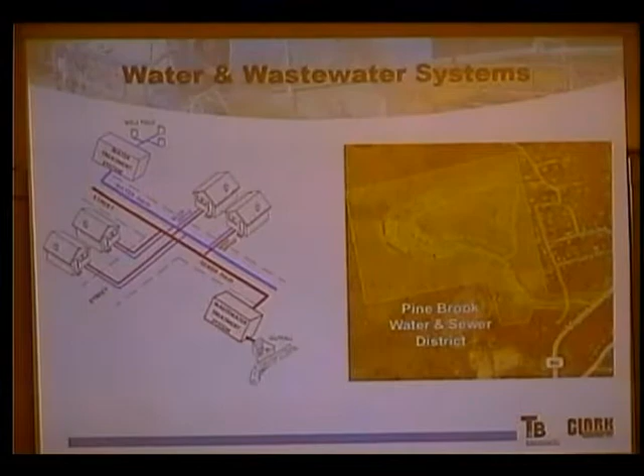So again, I'm Erin Moore, and I'm from Tighe & Bond Engineering, and I was one of the project leaders. Oh, how are we doing? Okay, good. For the Pinebrook water and wastewater system evaluations. And before I discuss the specific evaluation, I just want to provide you with a quick review of water and wastewater systems, just to make sure we're all on the same page.

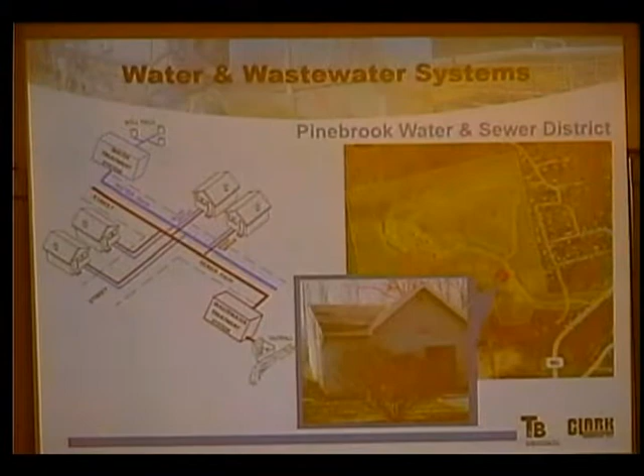So the water system for Pinebrook consists of source wells, there's 3, and a water treatment plant, and distribution piping, which carries water to your house that you use for drinking water. The wastewater system consists of collection piping, which takes sanitary sewage from your house, brings it to a treatment plant, it gets treated, and then discharged to a little stream. And actually, that's the water plant down there, red dot, and there's the wastewater plant there shown at the red dot. And I'm sure with the small community, you know where both of these locations are.

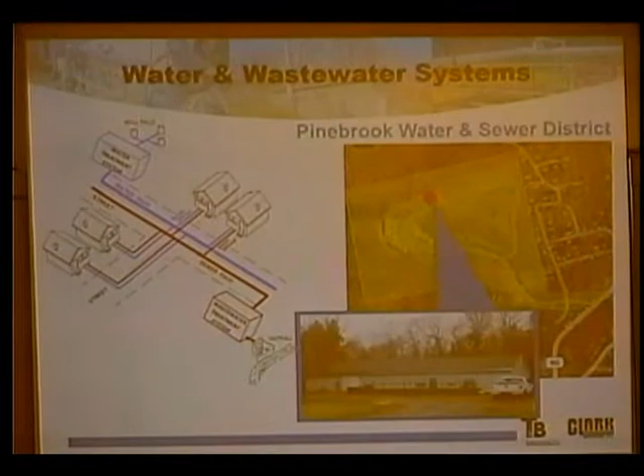So there were 4 main steps to the system evaluations. Understanding what's there, what's the existing system, and then understanding what improvements were needed, what could use some improvement, prioritizing these improvements, what was critical and what was less critical, and then estimating project costs.

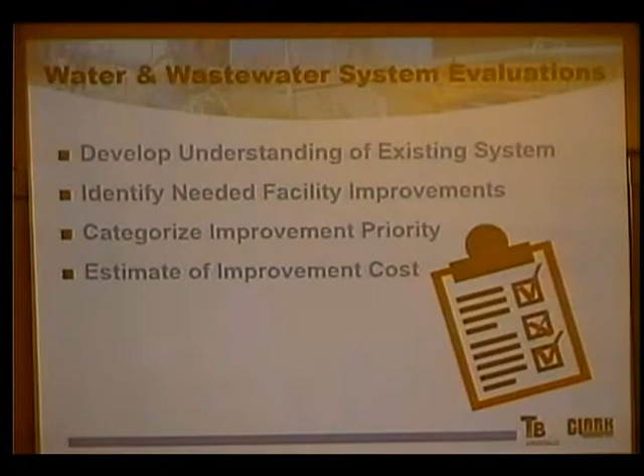The items that we reviewed for the water system improvements include system capacity, how much water do you have? Fire flows and the pressures in the line. Do you have sufficient, either of those? The water quality, drinking water quality. The physical conditions of the facilities, and if there was any potential for interconnections with another water system.

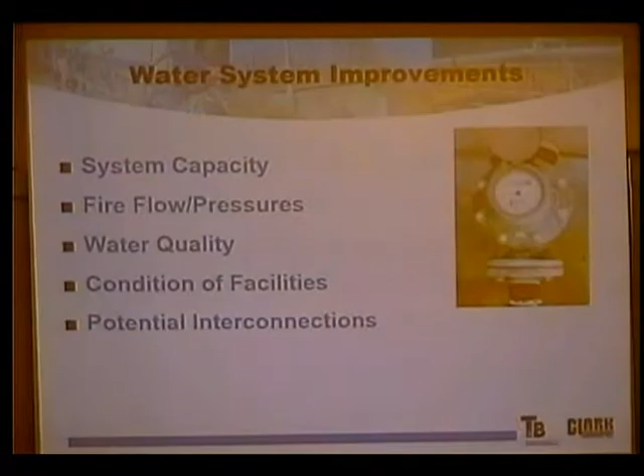For the wastewater system evaluations, we looked at the capacity of the plant versus how much wastewater is generated from the community. Inflow and infiltration. This means is stormwater getting into your sanitary sewer pipes, and is that a significant problem? The quality of the wastewater effluent, so how clean were we getting it, and then the physical condition of the facility.

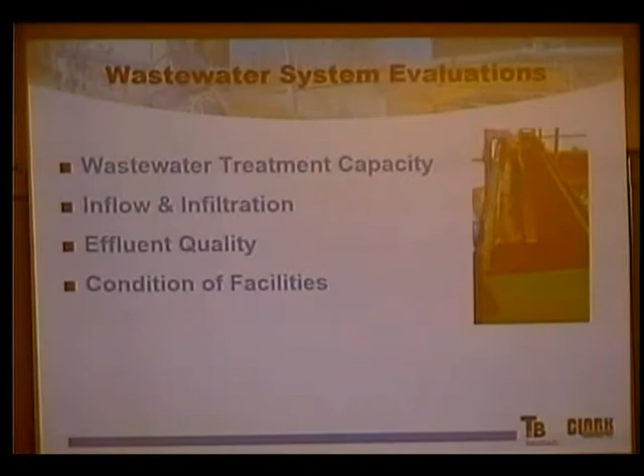So to evaluate the physical conditions of the facility, we completed a very, very full day on March 11th of site visits. We saw the water and wastewater facilities in the same day, and it was a lengthy adventure. We looked at the site, just what's there, the driveway, parking, fences, any physical site characteristics, safety components, the actual treatment equipment or mechanical equipment, the physical buildings themselves, the support systems, heating, ventilation, electrical, if there was any fire suppression, instrumentation and gauges, things along those lines. And then also for the wastewater systems, we inspected all the manholes in the system.

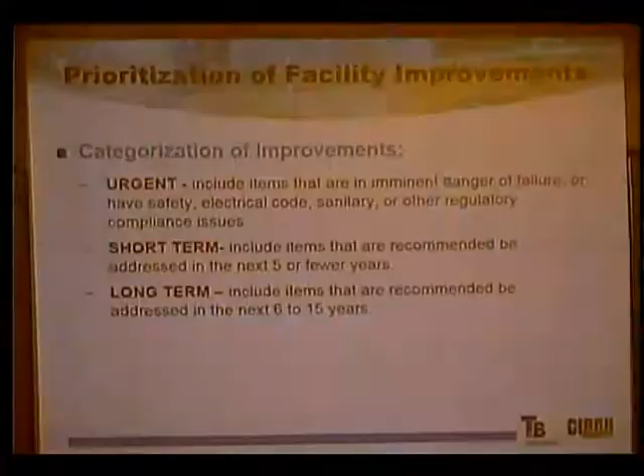And then once we identified the needs, we prioritized them. Urgent issues were mainly safety issues or equipment that we felt was about to fail. Short term were things that we thought should be replaced or dealt with within the next 5 years. And long term are things that needed to be dealt with in the next 15 years.

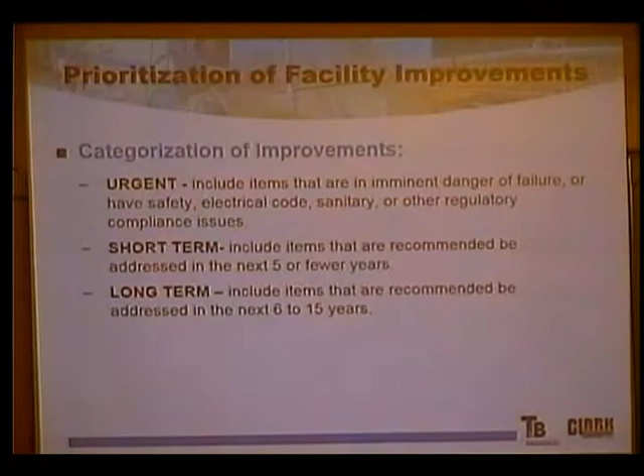And then we developed costs for those items. So system costs included sometimes getting equipment quotes, and then estimating how much it would cost to get existing equipment out of the building and then put the new equipment in. And then, if needed, providing temporary services in the interim when that work was going on. Then we applied standard markups to all the costs for contractor overhead, engineering design, costs that would impact the system owner, whoever that may be, and a percentage for project contingency, to account for unknown conditions.

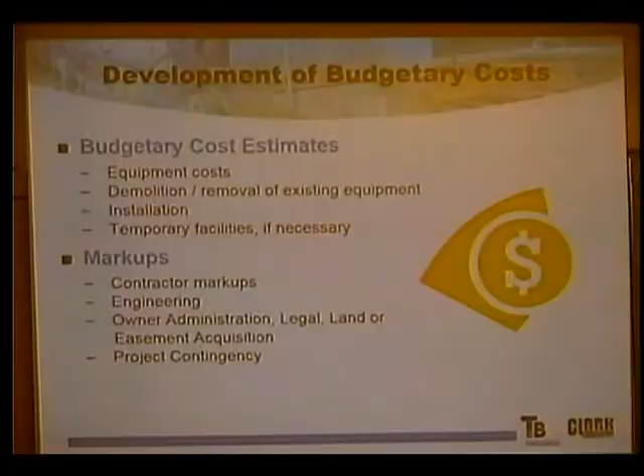These costs are intended to be very conservative, and we looked at the projects as if you did one single thing and you didn't group it together. Also, that you didn't use any in-house staff. You went out to bid and got a contractor for all of these activities. If work's done in-house or there's a group of work done at the same time, there's obviously savings with that. But for budgeting purposes, we need to be conservative because we don't know how these projects would be approached in the future. So that's just how we typically handle this, so you can look at one item and have a cost associated with one single item.

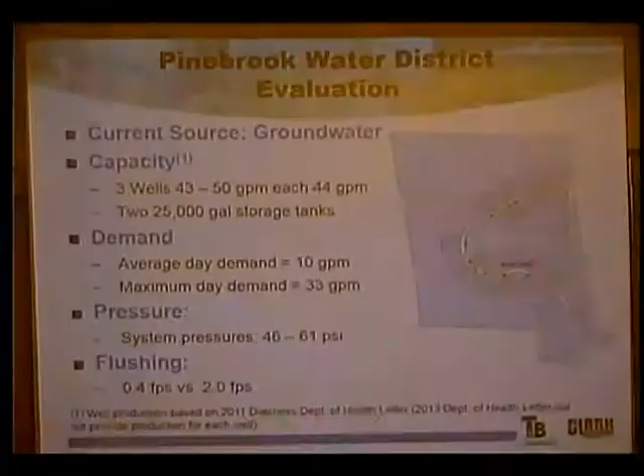So now I'm going to speak specifically about the water system evaluation. So there are 3 source wells. The wells produce between 43 and 50 gallons per minute, which is very sufficient for your residential water needs. But it is not sufficient for fire suppression. So there is not sufficient flow to provide fire suppression from your water mains.

The system pressure is acceptable, but there are hydrants that can be used to flush the system, but you don't get a sufficient velocity out of that. So in other words, we'd like to see water moving faster to really clear the lines out, and it's a little low for what we'd prefer to see.

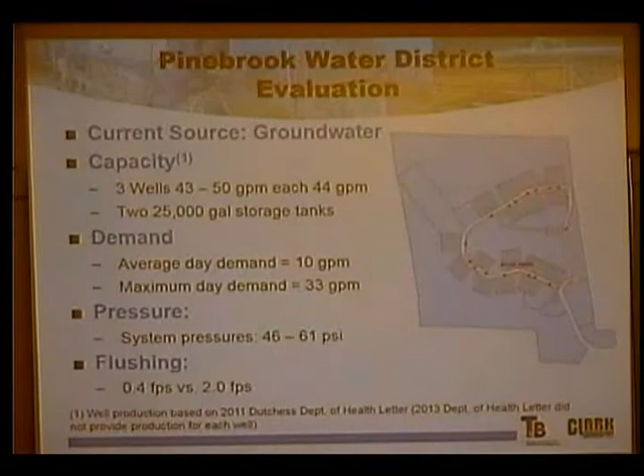The water quality at Pinebrook is generally good. There are a few issues that have popped up. There's high iron and manganese, which we tend to believe is from wells 2 and 3. There is high hardness across the board. Hardness is not a health concern, but you know it does things to your pipes and laundry and can make life in general hard, so to speak.

And then there also is high sodium, which is a concern for those with a very sodium-restricted diet. And so that's more of a public information importance, that if you have folks who are living in Pinebrook that have a sodium-restricted diet, they need to know that the drinking water is going to exacerbate that condition.

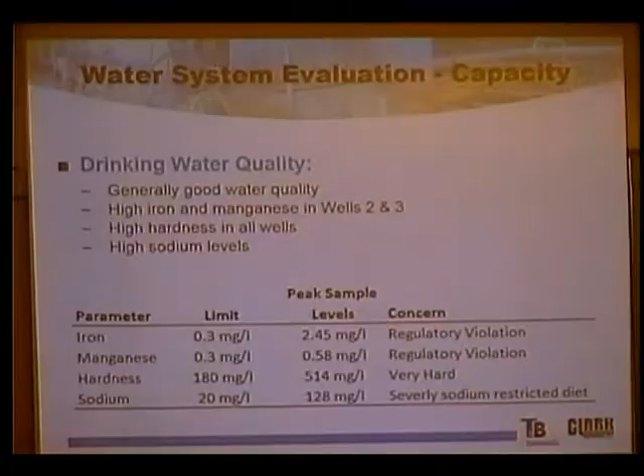So iron and manganese do have regulatory limits, and there have been violations for those limits. The other 2, hardness and sodium, are more guidelines that you'd like to be below, but they're not Department of Health violations by any stretch. If hard water was a regulatory limit, half of New York would be in violation, right?

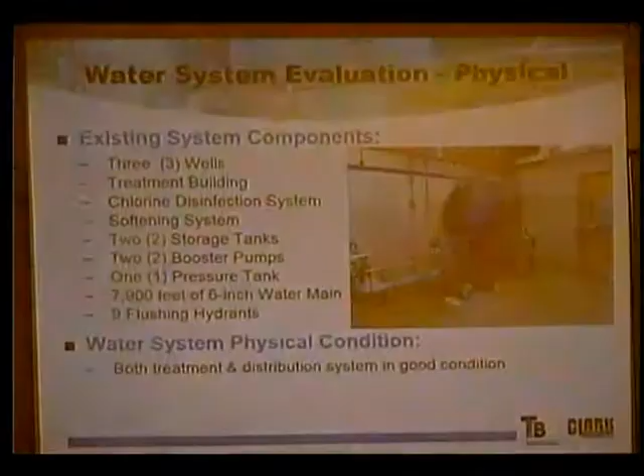So these are the existing system components. So again, we've got our 3 wells. We've got a treatment building, chlorine disinfection system, a softening system, 2 storage tanks, 2 booster pumps that are used to bring up the pressure, a pressure tank, just shy of 8,000 feet of 6-inch water main, and 9 flushing hydrants.

I just want to note the hydrants. While they're not, because of water capacity, suitable for fire flows, if a situation came where you had more water, they are the right type of hydrants to provide a fire connection. They do make little hydrants that are made just for flushing. These are real fire hydrants suitable for connections.

Go ahead. I have to look first. The fire hydrant. Yes. All right. Oh, sorry. I got in trouble. Used as the steamer connection. In other words, if the pumper has to pump into the hydrant. Can you just hold on for one? Oh, we've got a problem. Hold on. I'm sorry. There's a voice talking. You need to speak into, that's what's happening.

My question is, the hydrants on the property, if we need to use those hydrants in the case of a fire or a building going up, can the pumper, the fire truck, pump into the steamer connection of the hydrant and use the 2.5 outlets on that fire hydrant without backing up into the pump house?

While physically that could happen, your neighbors would not be a fan of that. In general, the fire department is very familiar with what you have there, and practices what you call rural firefighting techniques, which is tanker shuttles and bringing water there. Without that level of flow, when you open a hydrant to get a fire flow out of it, immediately everyone is going to have rusty, sediment-filled water in their houses, and again, would probably not be a fan.

So where were we? Okay. In general, both the treatment and distribution system is in good condition. Absolutely.

So based on the facility evaluation, we had several recommendations for improvement. First of all, as noted, there's typically only one well that's regularly in use, and the district was issued a violation from the health department because of this. However, it's believed that wells 2 and 3 are the ones that have the high iron and manganese, which has also caused, as we saw, Department of Health violations.

So what we recommend is to get all 3 wells flow tested. It doesn't look like that's been done any time in the near past, and really know what each of them are doing. The numbers we've presented were numbers that the Department of Health have on record, but we don't know where they stand. And then sample each well individually to figure out how much iron and manganese is coming from each well source. There are softeners on site which aid in helping with the iron and manganese problem. So get those running again, and then see where we stand, and be able to develop a course of action as far as that goes.

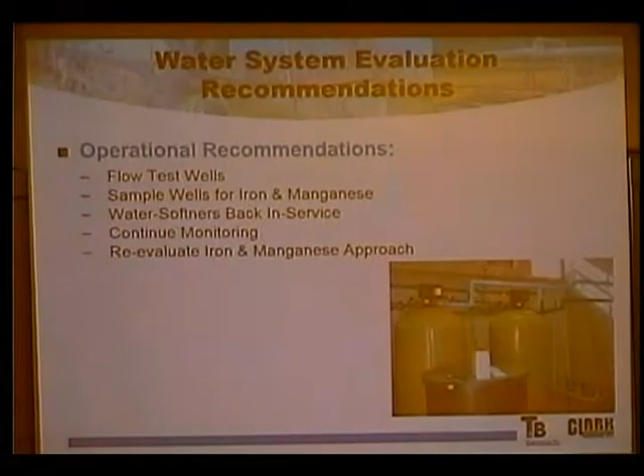Now, since we made these recommendations, the water softener has been brought back online, and the iron and manganese in the effluent seems to be good. However, the water softener is going through a lot of salt, which means money. Salt costs something. So still what we'd recommend is get them flow tested, sample each well, look at how much the softener's running, and figure out where to move from there.

But already taking this step and getting the softener running means you've got multiple wells running now, which is appeasing Department of Health. That's what they asked for, there to be multiple wells. So we're certainly on the right side of Department of Health when it comes to the things that we were cited for, and now proceeding forward. We just got to see how treatment is affected and how our salt usage continues.

So urgent improvements. There were several upgrades we recommended to the chemical feed system. The disinfection is bleach, it's a chemical. You'd like to see a few things for safety. Spill containment, that just means if the tank has a hole, it won't go all over the floor or into a drain. Labeling the tanks, so you know what's in there. An emergency eye wash and shower installation, and then also a ground fault receptacle for the chemical metering pumps are what we thought were urgent issues.

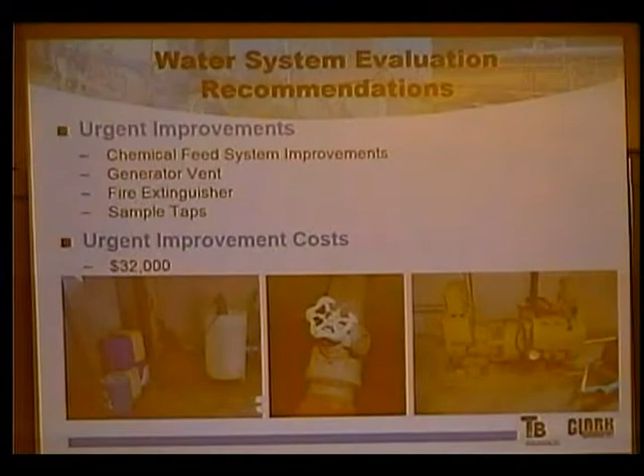Other urgent improvements include venting the generator outside, since the generator is vented in the building, providing a fire extinguisher, and replacing the sample taps. Let's see if I can get this to go on. That's the sample tap right here. So you can see that might not be the most sanitary sampling, and you could have perfectly clean water, but if there's a little bit of gunk here, you could get a fecal coliform, and we don't want that. We want your water, when you test it, to be true to what the water actually is. So replacing those sample taps is a good idea.

The significant improvements that we saw coming in the next 5 years include replacement of the booster pumps. Pumps typically have about a 15 to 20 year lifespan, and they're certainly there, so it's coming up on the horizon to replace those. The roof definitely is going to need replacement, and there's a few other building maintenance items. Some improvements to site security, and replacement of the electrical system, including the generator. From my understanding, the generator actually is not very powerful. It can almost just run the lights in the building, so it's not going to maintain your water service. So maybe a little larger generator that would actually run the treatment process would be a good idea.

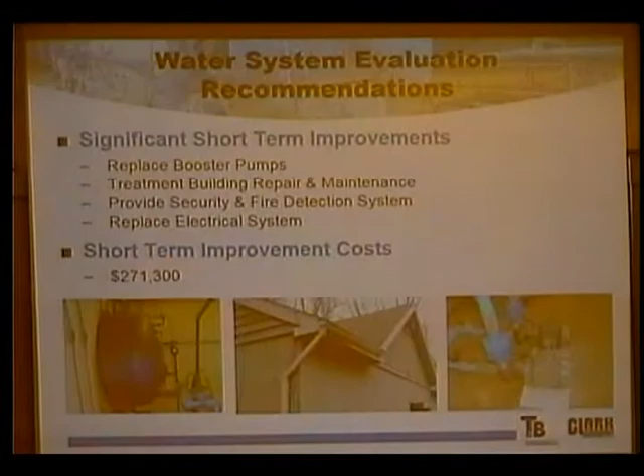So recommended improvements for the next 15 years, looking down the road. Replacement of well pumps 2 and 3. They're getting on in age, so new well pumps are going to be needed eventually. Replacement of the storage tanks. Those will be at the end of their service life in another 15 years or so. You saw the sample tap, but there are some areas of the treatment building piping that look similar and are going to need to be replaced. And then there's a little exhaust fan and unit heater, and those will be at the end of their lifespan by 15 years. So those are our long-term improvements.

Oh, and I'm missing the costs. I'm sorry. The total cost that we have estimated for those long-term improvements is $556,600. And I just want to remind you that's the sum of all these individual projects done by an outside contractor in a bid fashion with prevailing wage. So they're certainly budgetary and conservative.

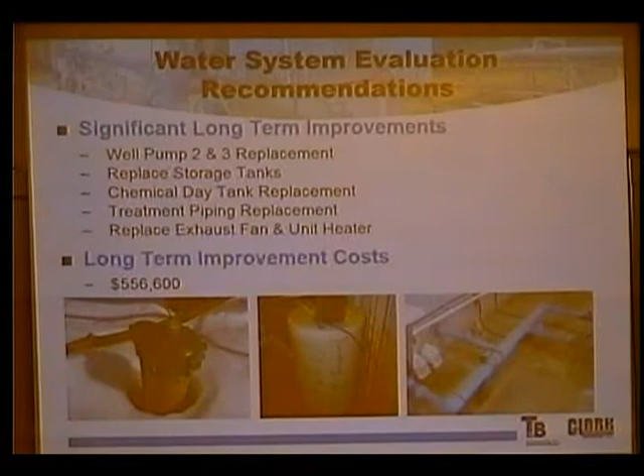So the other thing that we reviewed is the potential for interconnections with other water systems, which would eliminate the water treatment plant at Pinebrook, because you wouldn't need to treat your own water anymore. So these included connection to the Arbors, Greenbush, and the Dutchess County Water and Wastewater Authority Hyde Park system. Connecting to the Hyde Park system is the most feasible and the most cost-effective, but the total estimated cost is $1.2 million, and that's certainly more than all of these improvements combined.

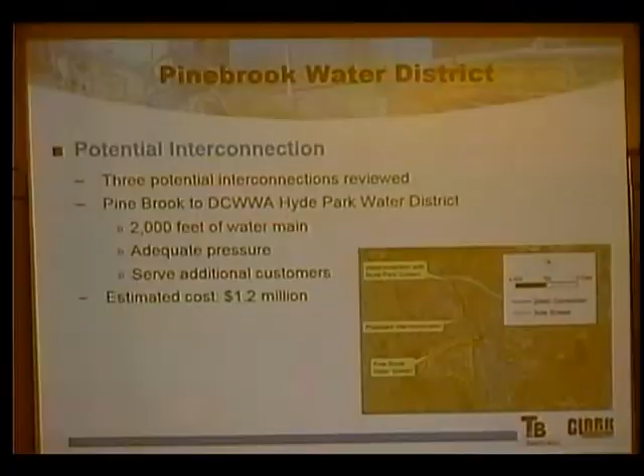So at this point, it's much more efficient to continue to run your own system economically than be looking for water elsewhere. Certainly, if the iron manganese continues to be a headache, then it might be something you want to come back to and look at, but that certainly should take some future analysis. And that concludes our evaluation on the water system. And I'm going to turn it over to Jonathan Churns.

Yeah, come on. I'll work on the microphone. I'm going to do a little height adjustment here. Can you hear me now? So, oh, right, yes. Everyone was so great at just asking questions, so I assumed.

Sure, go ahead. How much of your analysis is based on the analysis that was done by Morris Associates when the town took over the water system 5 years ago? We really looked at it from a new perspective, and we did all independent modeling of the different systems. So while we reviewed all existing documentation, it's a pretty fresh look.

I know 5 years ago when the town took over, Morris Associates did their analysis. They had a laundry list of things, basically like you just came up with, short-term and long-term repairs that need to be accomplished. How much of what they decided needed to be done 5 years ago has been done, and how much still remains to be done?

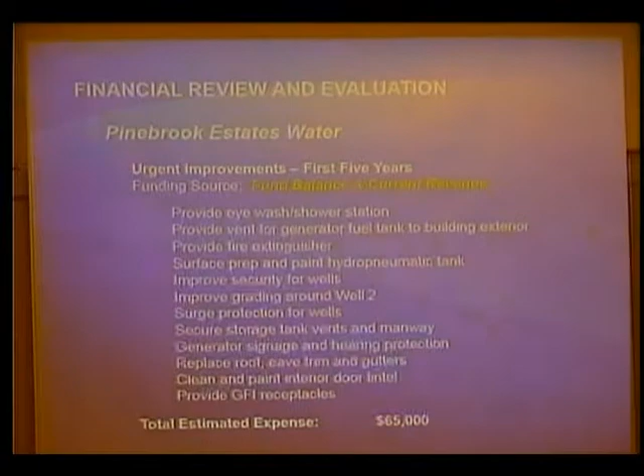So obviously we have a lot of chemicals in the facility, and so you need to have worker safety as an important component, and having an eye wash station in the facility is important. We'd look to move that forward. The generator, as Aaron was mentioning, is undersized at this time. It really only runs one of two booster pumps. It provides pressure to your system from available storage, but it does not have the capacity to run your pumps, chlorinate the system. Many of the components in the facility are not available. You cannot obviously run the water softeners that we've discussed a couple of times. So the generator is undersized, but it meets your needs to provide pressure to the system and provide the water that you have during the initial part of an emergency.

You're shaking your head. Is that a no? It does not. It does not. The answer was it does not. Well, so we recognize. In practical terms, it does not have the power to provide water to the system in the event of a power outage. So what the answer was from the gentleman in the audience was that the generator does not have the capability to provide the power to run the facility and provide the service. We recognize that and understand that the generator would need to be replaced at some point in the near term. In the next slide, I talk to that a little bit more. But in the immediate need, it does provide some pressure to the system and keeps you operating through a power outage. And so at the minimum, we would look to vent the generator to the outside so that it is no longer an issue to the facility and those operating it. And we'll talk a little bit more about the generator as we go on.

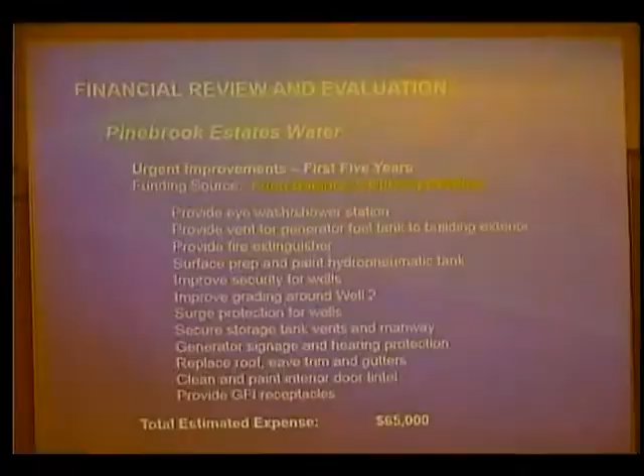Simple things like fire extinguishers, the hydropneumatic tank. In one of the photos that you saw up there, it protrudes from the wall of the water plant, and the paint is peeling off, it is rusted, it needs to be scraped and painted so that it can be preserved for as long as we can use it to improve the lifespan. Security for the wells needs to be improved. Grading around some of the wells should be done to ensure that we don't have intrusion of water into those areas inappropriately. Surge protection for the wells should be installed. Certain vents and manways need to be secured so that we don't have issues with people getting into the facility that shouldn't be there.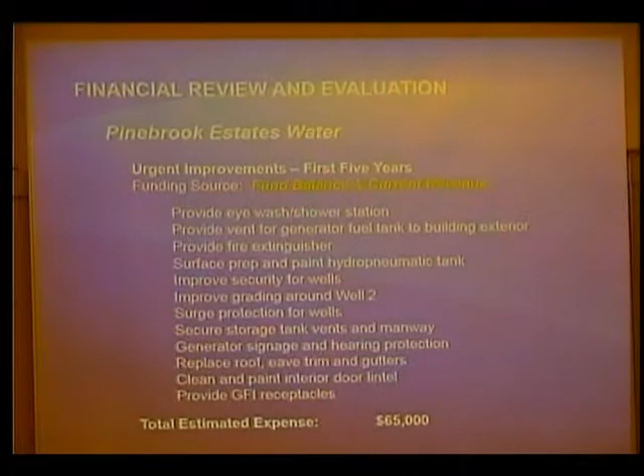Generator signage, hearing protection, more worker safety items, protecting the envelope of the building. So the building is approximately 30 years old. It was built in 1985-ish, and the roof, the gutters, certain eaves need to be updated, and so we would look to do that in the first 5 years. More painting on the inside, and then obviously GFI receptacles are important when you're working in a wet environment to make sure that your workers are safe. And so there are certain points in the facility that we would look to do that. The total estimated expense for this is $65,000. We would move this forward through fund balance as well as from the revenue of the system to make these improvements. And these would all be done in the first 5 years.

Looking forward and beyond the urgent items that need to be done for worker safety and just to generally keep your plant operating, there are more long-term concerns about what needs to be done there. The iron and manganese is obviously an issue with the facility. There are drinkability issues that come along with the sodium and so on, and those are items that can somewhat be abated through the treatment that you have at the site, but may require a future look as those wells maybe change over time. As Aaron was mentioning, there needs to be more understanding of what those wells can produce and how they're changing over time.

So in comparison, you have these unknowns that come along with your water treatment plant. It is probably the low-cost option to continue operating that facility and move it forward. As an alternative, though, there's the interconnection with the Hyde Park Regional Water System, which would bring fire protection to your area, as well as different pressures, probably better. All that would need to be determined through an engineering evaluation. But there are opportunities that in the future that could happen.

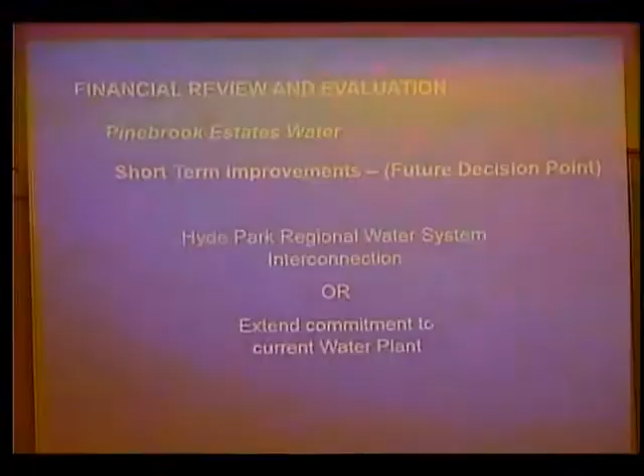How that number divides today, we don't know, because we don't know what intermediate areas would want to interconnect. There's also the opportunity that Greenbush and Violet Avenue, which currently have water quality issues from the water that they purchased from Poughkeepsie, may also want to interconnect and could further spread the cost and make it more economically viable to receive water service in your area. So there are certain items we're about to talk about in the next slide that we would recommend be deferred for several years while we evaluate this situation and understand what it is that you have with your particular water plant.

So again, there's that future decision point of how do you move forward? Do you interconnect with another system or do you maintain your system? If at some future date it's decided that an interconnection is not the way to go, these items will need to be addressed. And so there's the generator. It does not run your facility, it does not meet your needs, and so it would need to be replaced. That's not an insignificant cost, but it is one that would need to be addressed.

The electrical systems within the facility are approximately 30 years old, and they are reaching the end of their life cycle. As we get in beyond 5 years, you're at 35 years. You get beyond 10 years, you're at 40 years. Again, these things need to be addressed. The booster pumps, they are at or beyond their lifespan and need to be considered for replacement. And I think there was a photo of them in the earlier slide, and it showed that some components are actually somewhat rusty, which gives you a window onto the condition of the equipment throughout.

Flow testing the wells. We've talked about that a couple of times here. Basically, wells draw water from the ground, and there's screens in there, and over time they get clogged. The ground can change its ability to draw the water. The chemistry can change depending on how much you're drawing. And the flow tests with the chemistry that go with it will give you a window onto what is the life expectancy of the wells that you currently have and how you move them forward.

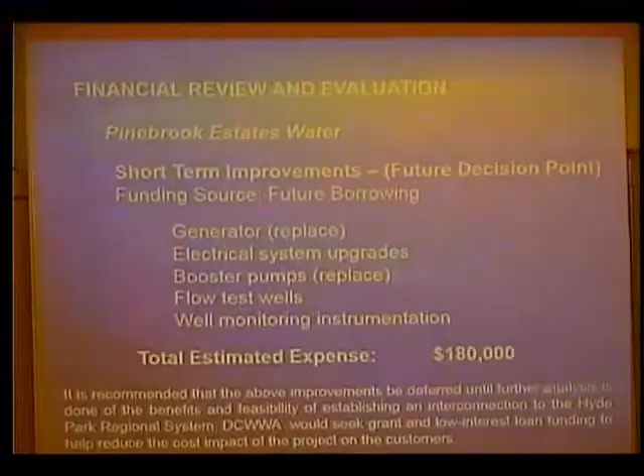And then well monitoring instrumentation. If you have data over time, you understand better what it is that your wells can produce and how you would carry them forward. So these are all items that we would look to address in the long term if you don't seek to interconnect with the Hyde Park Regional Water System, and the Water Authority would carry your plant forward as it is and try to make the best of the wells that you have with the chemistry.

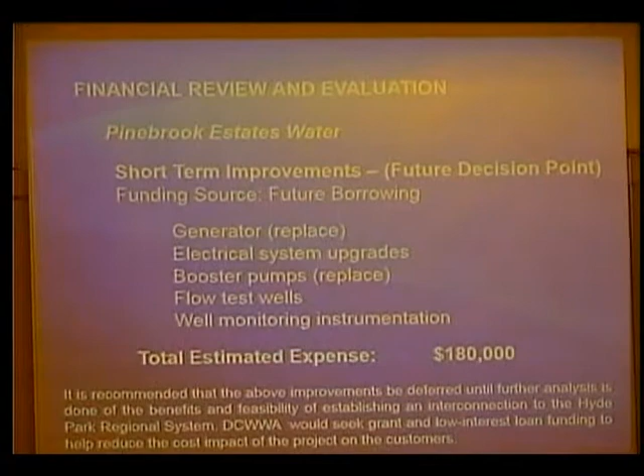The total expense for these items we predict would be about 180. This is using our in-house staff as well as our contract operators, and some components may have to be done through other processes because they're larger expenses. And next, I would like to invite Bridget up to speak to the financial evaluation of your water system and how the Water Authority would operate it going forward.

So the other part of the overall evaluation, along with looking at the physical condition, is to look at the financial condition of the facility. We looked at actual revenues and expenses over the past several years. We looked at the projected results for 2014 and what the town has recently adopted as the budget for 2015 to determine the overall financial condition of the facility, and so that we could present accurate projections of what those costs would be under the authority's ownership and management, and ultimately what that translates to you as a cost per household.

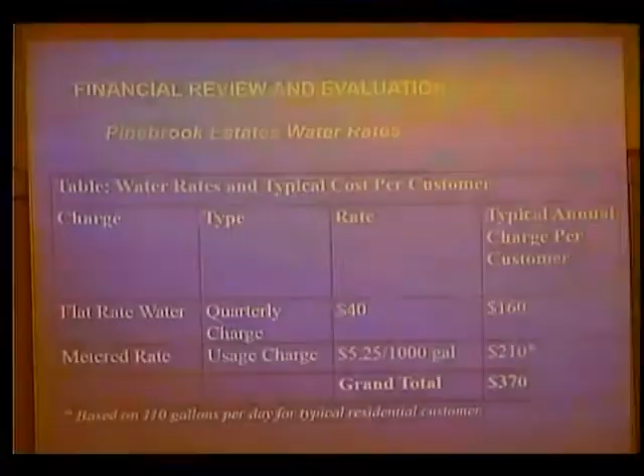So starting with your current rates, you pay a usage rate for your water, an O&M charge that's made up of a quarterly charge of $40 per quarter for $160 a year, and then a metered usage charge of $5.25 per thousand. For the average water customer in Pinebrook, that comes out to a charge of about $210 for your metered usage and a total cost of about $370 a year.

So you are well below the statewide average threshold that the New York State Comptroller provides each year of $862 a year. So from that perspective, you're in good shape.

I think it jumped a few. Okay, yep, that's what I wanted.

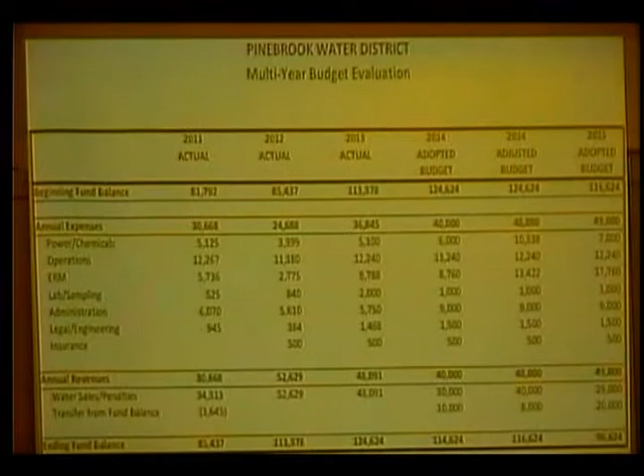So here's a presentation that we put together of a multi-year budget evaluation for Pinebrook, from 2011 through the 2015 adopted budget. A couple things specifically to note is that over time, overall expenses are trending upwards. Electric rates, as you know from your own household electric bills, have been increasing. There's been some increasing expenditures for equipment repair and maintenance that you would expect with a system of this age.

One of the initiatives of this administration and the town has been to look more carefully at the cost of the labor that the town provides to administer these systems, to deal with the budgeting, the accounting, the bookkeeping. And the town has been working to increase those numbers to accurately reflect the cost of the labor that the town provides to the system. So you do have generally upward trending expenses. Rates have remained flat since 2010 when the town took over the system.

The system has a healthy amount of fund balance. We show each year where the fund balance amount starts and where it ends. And as you can see, you were really building fund balance over the last couple years, but in 2014, expect to use some of that fund balance to offset system expenses without impacting rates. And again, projecting to use some fund balance in 2015 as well.

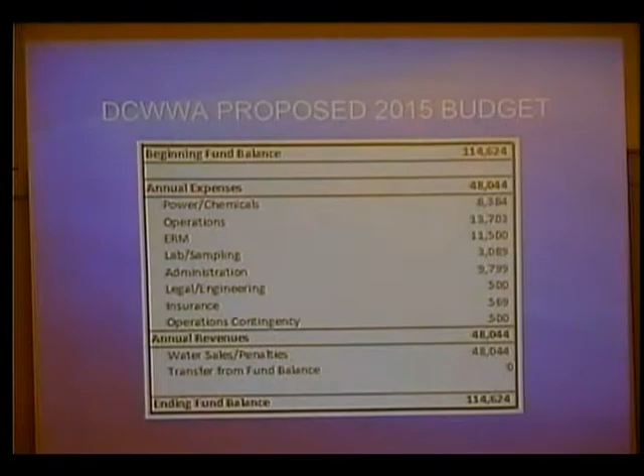So the next thing we did was put together, for comparison purposes, a 2015 budget if the authority owned and operated the system for the full year, with the management of the system, the operation, the billing, and the bookkeeping, all of which we would do in-house. So the bottom line is that we see the expenses being very similar to the expenses that the town has budgeted for 2015. We would see the current rate structure that's in place being suitable and appropriate for the system, in particular given the fund balance that the system has.

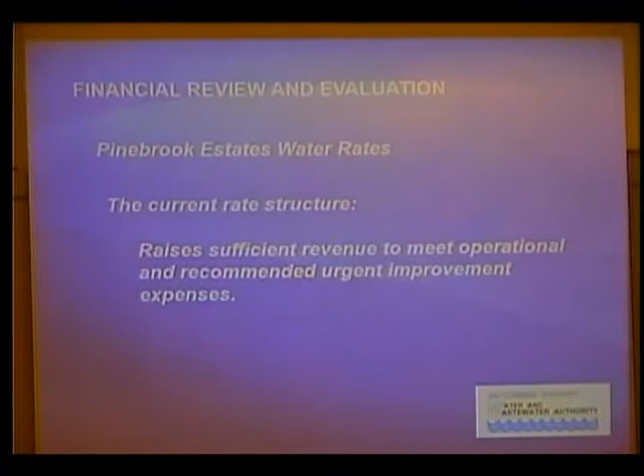So at the end of the day, if the authority were operating the system in 2015, we would see no impact on the customer rates. Over time, as systems age, as you deal with more infrastructure that needs to be replaced, as the fund balance that you've accumulated is gradually drawn down, you would need to see a gradual increase in rates, whether it was owned by the authority or the town. But overall, for now, we see it as a system that's in good shape financially, where the rate structure is appropriate.

So what we talk about next is whether there's any questions that anybody has, and then we're going to go on to a discussion of your wastewater treatment plant. So any questions on anything that we've covered so far? Okay. I'm going to turn it over to Jonathan. He's going to give a quick history just to help put in context some of the discussion about the wastewater plant, what some of its particular history has been.

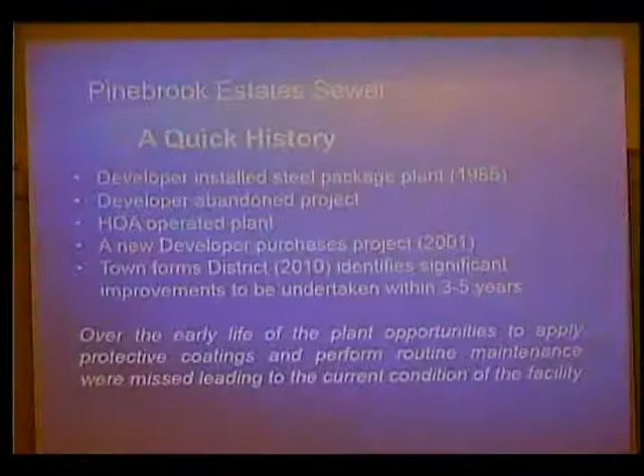Thank you, Bridget. A quick history of your sewage treatment plant. This somewhat also lines up with your water treatment plant, but it has more parallels for the sewage treatment plant. Maybe in comparison, it would be good to talk about both for a moment. Your water treatment plant is a concrete block-built structure. It's in relatively good condition for its age compared to the sewage treatment plant. Your sewage treatment plant was originally developed by a developer. It was put in as a steel package plant with no protective coatings.

That was done about 1985. Eventually, the developer abandoned the project before finishing all of the homes, as some of you may know as longtime residents. The Homeowners Association then took the opportunity to run the facility as a necessity and carried it forward. A new developer eventually came in 2001, finished out the homes, and moved the project forward, finishing the collection and distribution system and so on.

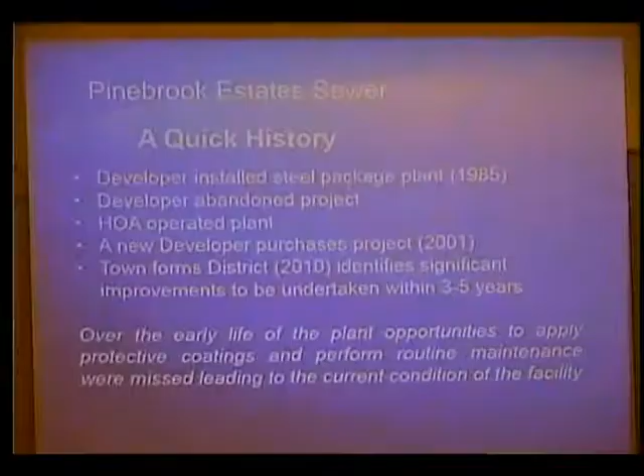In 2010, the Homeowners Association, the developer, asked the town to come in and take over the system, and so the sewer district was formed and the system was eventually transferred. There's a document that was created in that transfer process called a map, plan and report, and that contains everything you need to know about how the system will be transferred, the improvements that need to be done, the cost to the customers in their first year, how capital improvements at some point would be apportioned among the customer base, lays out the properties that are included in the boundary and so on.

And when you read through that document for the sewage treatment plant, you see that there were significant components that were identified in 2010 by the town that would need to be addressed. And as Erin goes through her engineering evaluation of the system, she'll highlight some of those components and lead you through that just to show you where you're at today. But just to mention to start, the influent tank where everything comes to the plant, as well as the equalization tank, that one that you see outside with the lattice fencing on it, those were identified, as well as the sludge holding tank, which is a part of the EQ tank, as needing to be replaced in the first 3 to 5 years of the town's ownership.

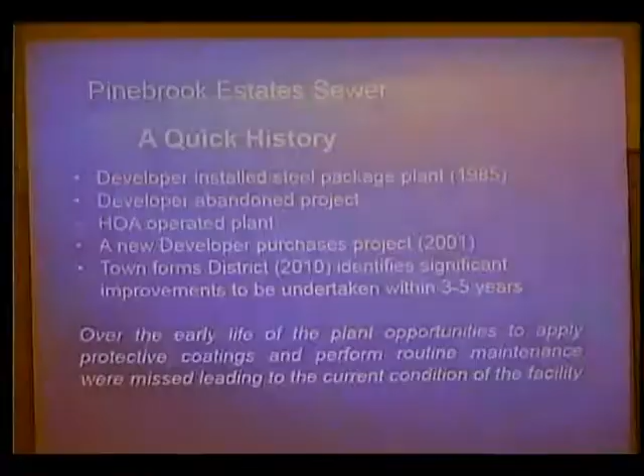And so what we found, and Erin will go further into this, is that many of the tanks, because preventative maintenance and also the protective coatings from the early days of the operation of the system were not done, we're finding now at 30 years that all of the tanks are in a similar condition to what was found with the influent gallery, as well as the equalization and the sludge holding tank. And so that's your history of your facility and how we got to where we are today. But remember that there are many actors along the way that have led to this facility reaching this particular state. I'd like to ask Erin to come up.

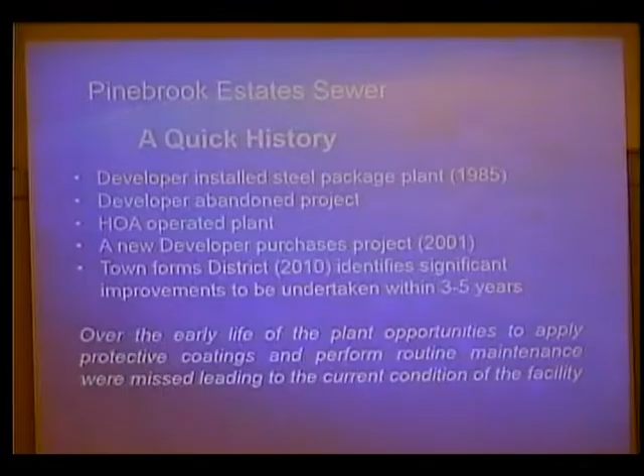So as Jonathan explained, I'm going to move on to the wastewater system evaluation. So the plant has a capacity of 48,400 gallons per day, which is very sufficient to meet the needs of Pinebrook. Average flow about 16,500 gallons per day. We inspected the collection system for signs of inflow and infiltration. I mentioned that earlier, that signs stormwater's getting into the system. And while we found some evidence of that, it wasn't a big significant impact. Sometimes stormwater can be the bane of a sewer system and really get into the collection system and triple flows or quadruple flows. And that's not the case at Pinebrook.

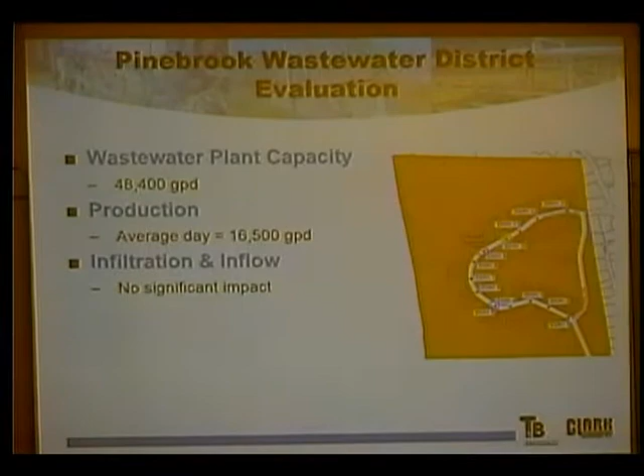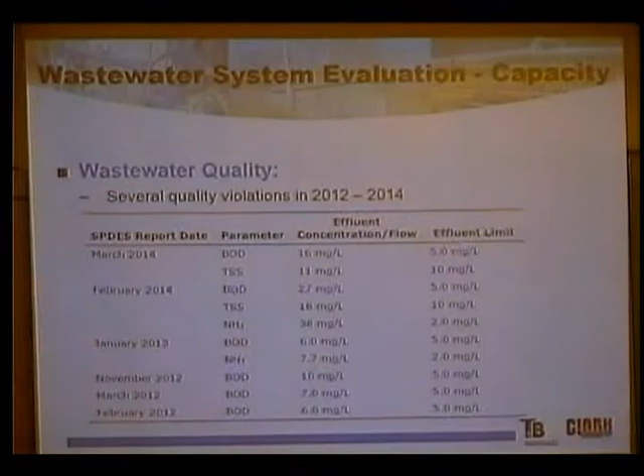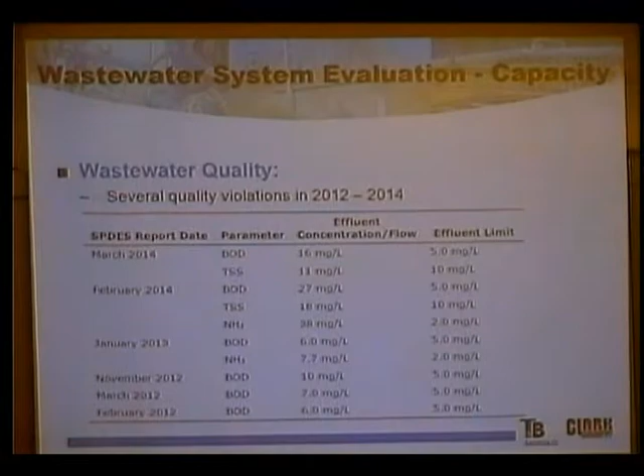So we reviewed the quality of the treated wastewater effluent. And there were several effluent violations in 2012 to 2014. And violations are a serious issue. Through the combined efforts of the town, their engineer, Morris Associates, the plant operators, VRI, and with operational management provided by Dutchess County Water and Wastewater Authority, some temporary patches were put in place to improve the plant, and no violations have occurred since this last one in March 2014. So everyone really rallied and came together to stop the violations, which certainly can lead to DEC action, and we don't want that. That'd be a problem. So everyone really came together like a super team to get the plant back on track for now.

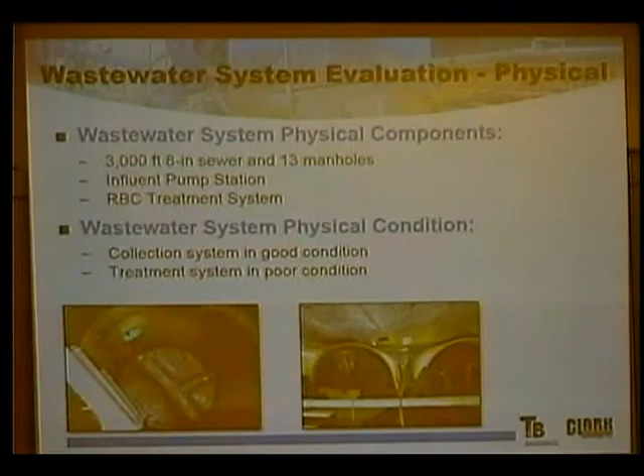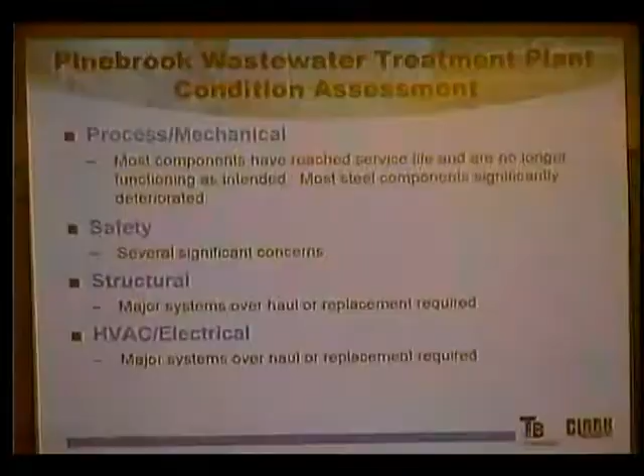So the physical components of the wastewater system: about 3,000 feet of 8-inch sewer, 13 manholes, an influent pump station, and it's called a rotating biological contactor treatment system. So in general, the collection system, we found it was in good condition. And the treatment system, we found it was in very poor condition. So we categorize the treatment system as poor for several reasons. Most components in the treatment plant, installed in 1985, they've reached their service life, and most of them are beyond, and many of them were not functioning as intended.

The atmosphere in the building is very humid, there's no ventilation, and it was deteriorating equipment even further that still was functioning. It really has some problems with rust and just in general deteriorating. There were many, many safety concerns. Not the least is the physical condition of the building. It was very deteriorated. The lack of ventilation also damaged the electrical components.

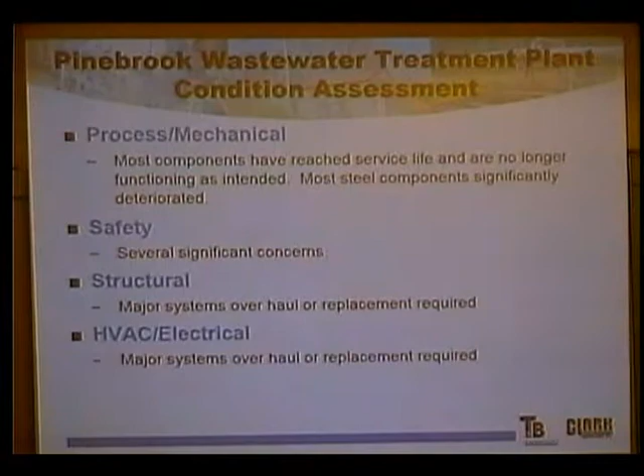So as I noted previously, as far as urgent improvements, we were really concerned about safety at the treatment plant. Significant concerns included egress or lack of egress, which is certainly a concern for operators. Lack of railings, damaged ceiling panels that were falling down. That's certainly a hazard. Exposed roof trusses, which showed signs of significant water damage. And electrical panels that were in poor condition.

There's also very limited site security, and I know there's been a little bit of a recent improvement on that, and there's an open tank right in front of the building, but pretty much nothing to stop access. And I'll tell you a quick story on this. We had surveyors who were part of our team who went out and did some manhole inspections, and they said, oh, we had to walk up to the building and look in the tank. And they're surveyors who see wastewater stuff all the time, and they could not abate their curiosity and go peek in the wastewater tank.

So if you extrapolate that, probably when I was a kid, I would have looked in the wastewater tank, but it certainly is a little bit of an attractive nuisance if there's no protection. So we understand definitely that some of these items have had some temporary fix to resolve some of the most critical safety concerns. Definitely one of the things that we wanted to emphasize is ongoing checks on those roof trusses, because there was a lot of water damage there.

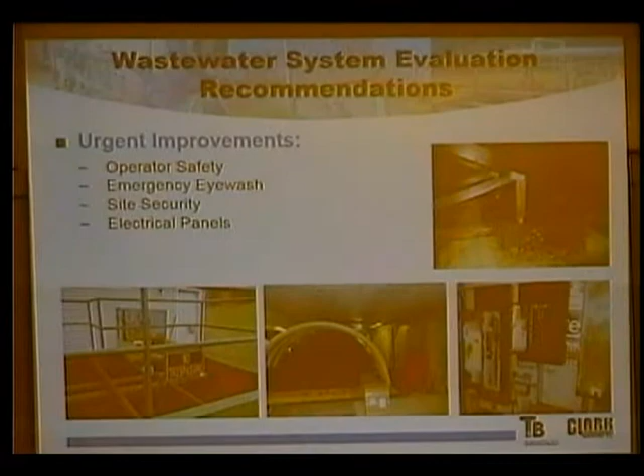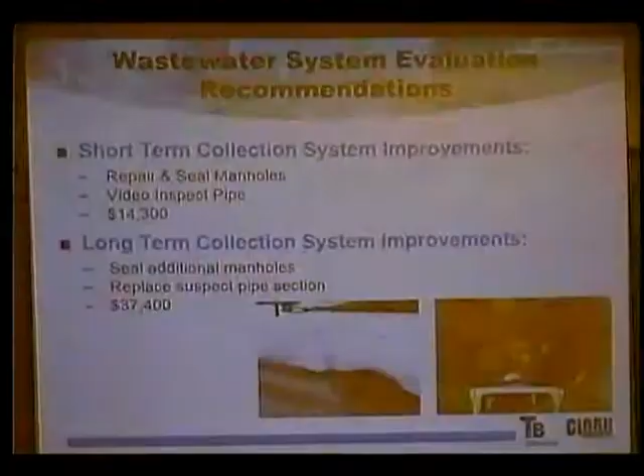Okay. So we did have a few recommendations for the collection system. Again, in general, it was very good, but there were some manholes that had a bit of infiltration we'd like to see sealed up. So this is a manhole that's got that melting snow, and so there's pooling water on top, and anytime that happens, that's introducing water into your collection system. Why don't we want that? Because you have to pay to treat the water. So why would you want to treat clean water? You don't. So you want to keep storm water out of your wastewater system.

And here, this is the manhole outside the plant, and you sort of see that staining on the wall. So there's some leakage going on there. So short term, seal the manholes where we noticed a little bit of leakage coming in. And then in front of the rec center, we've got this trouble section of pipe. We don't know what's going on there. It should be TV inspected. See if there's a belly in it, if it's sagged, what's happening in that piece of pipe, because we know that section has had some trouble in the past.

Then for long-term system improvements, we recommend sealing up the additional manholes to prevent future deterioration or groundwater getting in, and we put in funds to replace that section. Now, until you TV inspect it, we don't know if that's what's going to fix that, but we need to see. So we definitely have the funds in there to replace that section in front of the rec center from manhole to manhole. And so that's the budgetary number we put in for our long-term improvements.

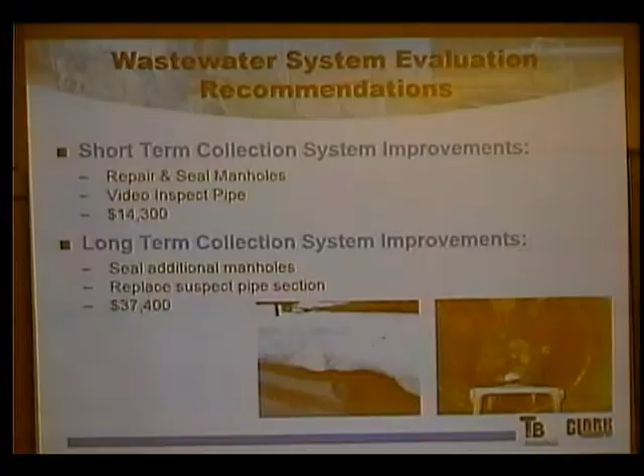Okay, and so I think you know where this is all going. For the treatment plant, we recommend complete replacement. And there are many reasons that go into that recommendation. Some of the components don't meet current standards for their sizing: clarifiers, the sand filters, the contact tanks, and also the steel tanks are in a very deteriorated condition. They're at the end of their life, and there's not much we can do with this. You can temporarily fix them, but you can't weld rust, and that's really the condition of these tanks.

A failing tank could mean an immediate release to the environment, and everything's in steel tanks. So there's just not a lot of approaches here in regard to fixing these steel tanks. It's expensive to fix them, and they're going to just continue to fail. The other point is the structure. We're very concerned about the structure. The structure needs to be replaced.

So this is a good image. If anyone has not seen the plant and has an opportunity to see it, I'm sure it could be arranged, you really should. The big tank out in front, though, is a great place to look at it because it's bright, it's daylight, you can see the tank, and all the tanks were the same material and installed around the same time. So the condition of that tank can help you gauge what the rest of the tanks in the plant you're going to encounter, certainly at the water level or beneath.

So this is showing some of the level of corrosion and rust in the tank. These, again, are the RBC units. You can see the ceiling panels, some that are down over the units themselves, things just hanging down there. It's also so tight in this building. And you need to be able to get around equipment to operate it. And here, there's even places where I sort of had to do the side shuffle to get around. And that's not what you want for your operators.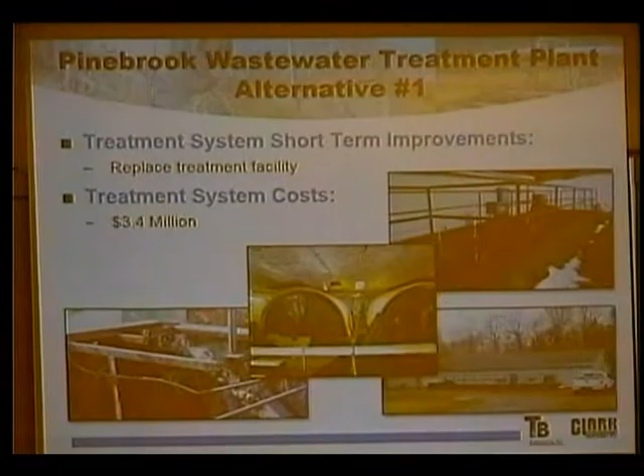Would you be replacing it with a package plant type, same thing? You get a few options, and definitely, yeah, I'll talk a little bit about that. There's several things that would work. So, yes, in general, it would be some type of package plant. No steel tanks. Yes.

How much time do we have here before the roof falls in and we have an environmental disaster? Exactly. Time is the most critical factor here. As Jonathan noted, it was generally agreed in 2010 that major things needed to happen at the plant. And now we're 5 years later, and none of those things have happened. So as the years go on, the plant's in worse shape, and this is nothing that we can just click our heels and have a brand new plant. This is what would happen. Let's just say, starting today.

The first thing you need to do, that was a good question about the package plant. We've got site constraints, what's gonna work? So we've based our costs on putting a new RBC plant in because that seemed to be the most reasonable approach. The operators are very familiar with it. But there's some other technologies that have a smaller footprint but are a little more expensive. A preliminary design study figuring out what's the best technology, first step.

Then that design study is used as a basis for design where drawings and specs are prepared, and it goes out to bid and it's built. And that does not happen overnight. So our time is ticking now because there could be a critical failure. And what's it mean? It means money.

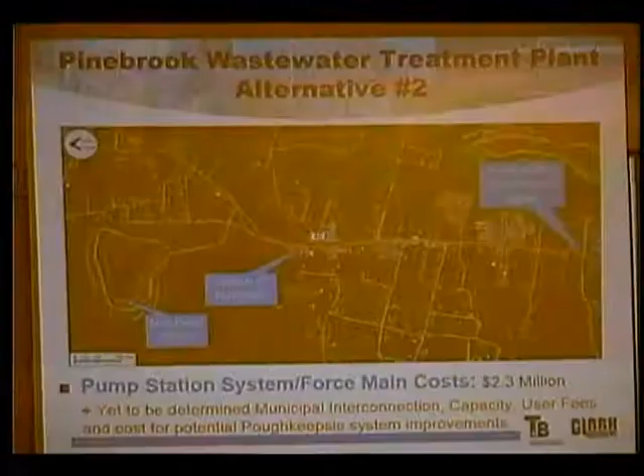So it's either connect with Poughkeepsie or build our own. That's it. Wasn't there some heavy costs? I think it was Greenbush looked into the water system with the city of Poughkeepsie, and they charged them a lot of money. You know, the one difference between water and wastewater is with water, it's the joint board, which is the city and the town, and with the wastewater, we're just dealing with the town. Obviously, we don't put this up here without having at least an initial approach, and they have been approached, they're open to the idea, but that's as far as we've gotten. So they're certainly interested. They'd like your wastewater. If you don't want it, someone else, but it's, you know, not for free.

Okay, great, thank you so much. Yeah. Okay, I can't promise what's going to be up here this time. Oh, they're back, okay. Do you have pets we can see? Oh, they could come next, I could find that. A wiener dog. I just want the opportunity to use the laser for a moment here.

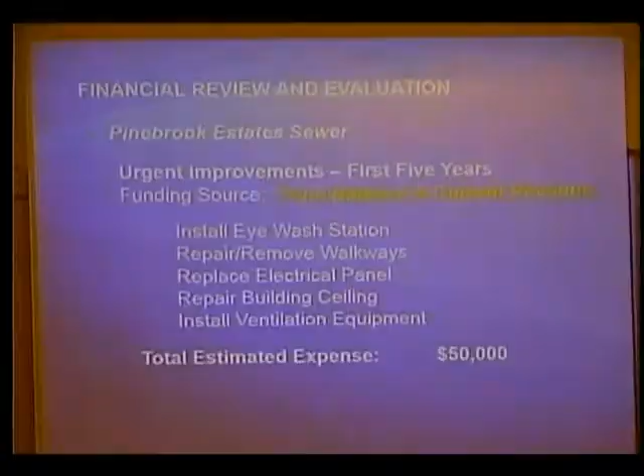The totality of these urgent improvements comes to a total estimated expense of $50,000. And we would look to do some of these immediately, but definitely within the first 5 years to move the facility forward and keep it operating during that period where we're understanding that long-term goal of replacing the treatment capacity, whether that be transmitting the materials down to Poughkeepsie or replacing the sewage treatment plant. And now I'd like to invite Bridget up to speak to the financial components of the sewage plant.

So again, like with the water system, we also look to understand the financial condition of the sewer district, starting with your rates. Flat rate, everybody pays the same amount, $133 a quarter, $532 a year. As a basis of comparison, again, with that state comptroller's average threshold throughout the state of $709, you're not in bad shape as far as the current cost.

We looked at the multi-year budget evaluation, and again, you're seeing increasing expenses, as you would expect, electric costs going up. There's been some very high expenses for equipment repair and maintenance because of the aging of the infrastructure and the fact that it's at the point where a lot of the work ends up having to be done as emergency repair work, which always adds to the cost. So again, overall, you are seeing some increasing expenses in the system. The revenues have remained flat. The rate has remained flat since 2010 when the town created the sewer district.

So since the beginning of 2013, you're seeing that fund balance drop from 140,000 down to 80,000, mostly because of that, and continued use of fund balance to cover the expenses of the system without impacting the rate. You're looking at probably about 60,000, 50,000 in fund balance at the end of 2015. Not an amount of fund balance that we would consider sufficient given the condition of the facility, the potential need to be doing more unanticipated repair work over the next couple years until a solution is developed, and then the known urgent improvement items simply to keep the plant operating of about $50,000. So you can see we're talking $50,000 of known expenses against $50,000 of fund balance.

As far as the base budget for the operation, electric, lab, and so on, again, we don't see the expenses being significantly different than what has been budgeted by the town. We know from experience, because we did help work with the town and with VRI over the last 6 months of 2014 to help operate the facility and try to get some of the treatment issues in hand. We think that we have a good handle on what the operation is going to require over the next couple years. We would work very hard to manage it to limit the emergency repairs that have to be done. So as far as day-to-day operation of the facility, we think that this is a legitimate budget, but taking into account that you're going to be spending down your fund balance to deal with those urgent improvements that have been identified.

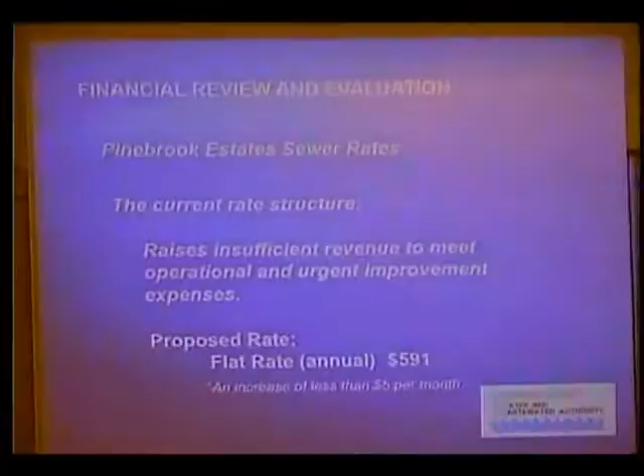Frankly, the alternative is that the plant deteriorates further. You spend more money on emergency repairs, and you potentially get into those worst-case scenarios that Aaron referenced of having enforcement issues with DEC, having a total failure issue with the plant, and having to bring in a much more expensive solution on an emergency basis. So that's our recommendation as far as where we would see the rates for the system going.

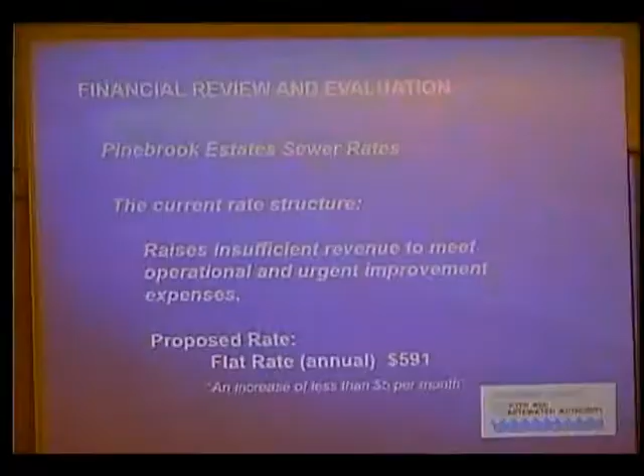Obviously, as you start to deal with the bigger issue of replacement of the plant, whether it is a new plant built on this site or an interconnection with Poughkeepsie, that capital cost is going to have a significant impact on the user charges. We would look to evaluate those solutions not just on what the capital cost is, but what the operational expense is, and essentially you look at it as a life cycle cost. If you implemented one of those different solutions, how much is it going to cost you to build that, to operate it? What's the cycle of replacement of that infrastructure, so that you're looking at the most economical way possible to have adequate treatment of your wastewater.

The authority also looks to pursue grant money, low-interest loan money to offset the cost of capital improvements. We've been successful in obtaining low-interest loans for a number of projects that we've done with our facilities. By working with the town, even as the engineering evaluation was being completed, we were able to get the Pinebrook Sewer on what's called the annual list for the state's Clean Water Revolving Loan Fund program. It's the major funding program that New York State has for, in this case, wastewater treatment issues. It's administered by a state agency, the Environmental Facilities Corporation.

And essentially what they do is provide low-interest loans. They provide subsidized loans, so the interest rate you're paying on any money you borrow to do a capital improvement is decreased. Under some circumstances, that program can provide all the way down to a 0% loan based on a hardship case. Hardship is evaluated on the median household income of the community that's being served versus what the total annual cost per household for the treatment would be, and that would include the capital cost and the O&M cost.

We have worked with that program as well before. We've worked with communities to develop income surveys, if we think that the census data isn't really going to give you the best shot at qualifying for that kind of money. So that's going to be an important part of that process going forward.

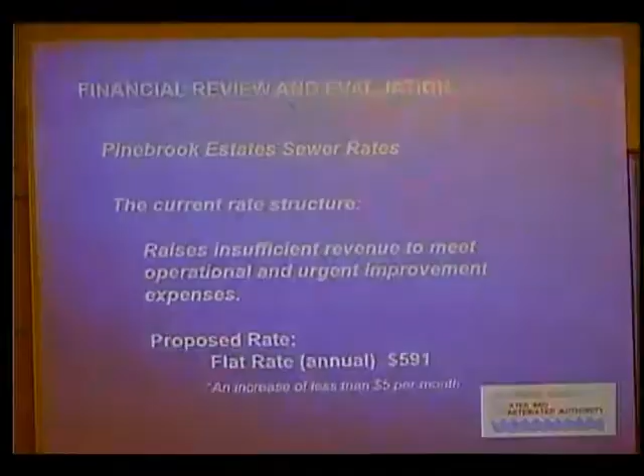You know, I think everybody can recognize that a $3+ million improvement spread over 132 households is a major financial impact. So it's going to be a matter of not only looking at what is the best long-term solution, it's a matter of managing that project as efficiently and as aggressively as possible to make sure every dollar that's spent is spent wisely. And it's going to be a matter of looking to see where there is outside funding support that's going to help offset that impact.

So again, the urgent improvements we see being paid for with the fund balance, but recognizing that that is pretty much going to deplete the fund balance. And then we look for the best way to develop and finance the long-term improvements for the system. And I think that's pretty much the end of our collective presentation. So if there's questions for Aaron, for Jonathan, Aileen, anybody, any questions, we're all here.

And the alternative to replace the system is $3.1 million. Does that include it at different footprints in order to keep one operating while the other one's being built, or how do you plan on, is that in the estimate? That's the challenging part. Yes, I had to decide how many pictures to put in here, but in the report itself, we have a few layouts that would work.